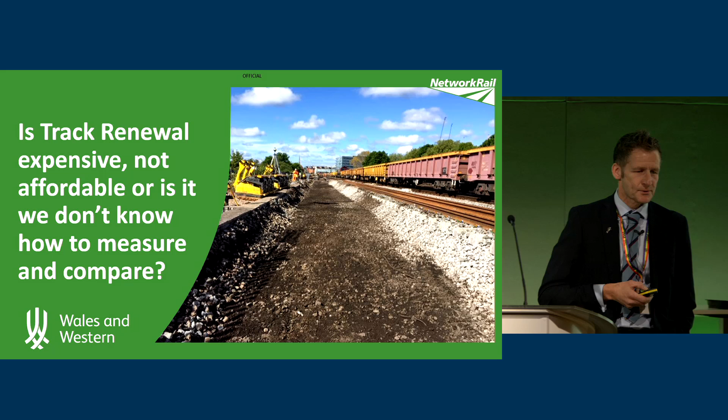There's a big echo in here. You might want to turn the lapel mic off if you could.

I could talk quite articulately about why we are where we are with some of those regions. But somebody presented me with one of these slides recently, which was actually broken down by route.

And their comments were, well, look at the guys in Wessex, they're bloody expensive. They were comparing them to everybody else. Well, actually, the guys in Wessex are the same as the other guys in Southern who deliver track renewals, because it's the same people. So it just makes the point that sometimes we compare ourselves thinking we're comparing apples with apples.

Sometimes, even if it's apples with pears, you kind of think, okay, that's still okay. But often, we're comparing apples with chairs, because sometimes we're not absolutely comparing the right things.

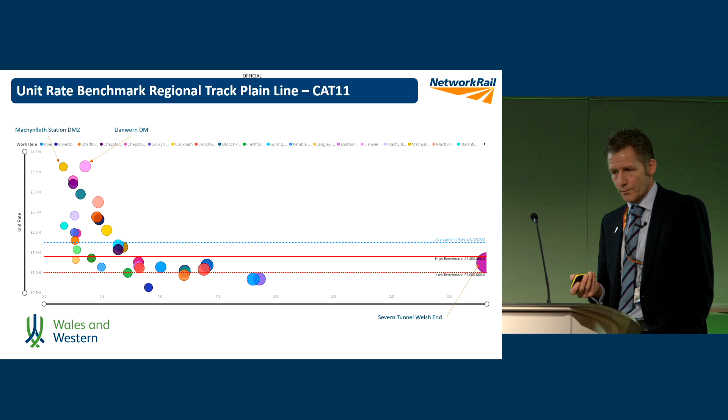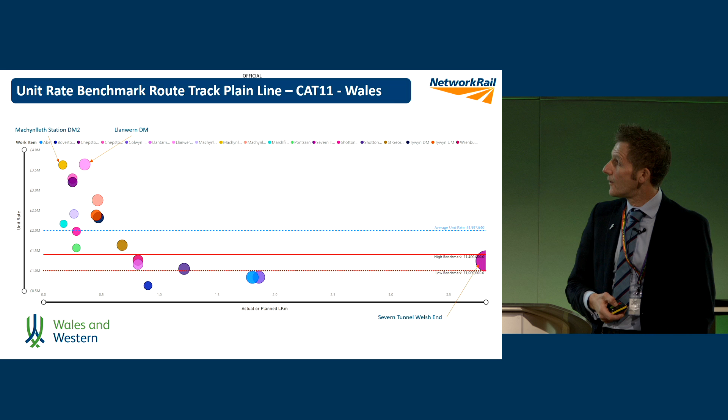So we've got all of this information now, so if anyone's interested in how we do this, I've got all this available electronically, and I'm helping my finance team in the region create this for all the other disciplines as well, not just track, so that everybody in the team, whether you're a very early stage engineer, very early stage project manager, or someone like myself, or anyone else in the team, you should be able to articulate why jobs cost what they cost.

So just to prepare for today, I thought, right, I'm going to get one of my team, which I did, to just create me the most simple kilometre job, the base costs.

This is the most simple thing, so none of that was in there. So I said, right, strip it all out, take all the complexities out. It's a nice straight piece of track between Cardiff and Newport. It's got no structures in it, no S&C in it. It's just a simple Cat 11. And all of that other complexity stuff was stripped out of the cost. And that's what it was going to cost me to do that job.

Over £1 million. Now, you saw the rates that were on that slide just now. 1.4 million was my high benchmark level, and £1 million or so was the low benchmark level. So if I do the most simple job in one stage, that's 1 kilometre in one possession, in the most simple way, it's going to cost me that, with the costs that we're experiencing. There's some fixed cost in there, and there's obviously some variable costs, because yes, we can be better. We can obviously do better. We can always do better. But that's what it was going to cost me.

Now, this is using the SRSA framework rates. If you did this exercise for the other alliances, it might be different. And also, we have 3 deliverers of track in Wales and Western. We have high output, and we have works delivery in old language. We've decided to call them construction services, but it's works delivery. So this is using the SRSA frameworks. And the type of work we put through the SRA - we did a piece of work, Andrew and I, a few years ago, to absolutely build a decision tree to say, this is the type of work that should be going to my multi-million-pound framework contractor, this is the type of work we should be doing via works delivery, and obviously the type of work we're doing through high output. So that's the kind of mix of fixed and variable.

So this slide - and I've got to thank Nick for the graphics on this slide, Nick helped me with this slide - you know, we have a lot of tailwinds which we're using to actually help us become more efficient, and I'll talk through some of those. I think we've got one of the best, certainly in Wales and Western, track is the best at planning, because we've got a work bank now with Andrew's support for almost the whole of CP7. So we're able to plan that work efficiently. I have got some challenges on, with links into one of the things that John was saying, that says my starting point for any renewal, for me as the deliverer, should be I want to do all my renewals in one stage.

So I've got a job in Severn Tunnel in the first 2 years of CP7. It's planned over 2 years at the moment. We've just done one half of the up main, and we're going to do the other half next year. The down main, I really want to challenge the team and say, let's put a plan together that gets it all delivered in one hit, one mobilisation.

It's 4.25 miles long, but we just did 2.5 miles with one of my most efficient numbers on that chart. Imagine if I could do that in one stage.

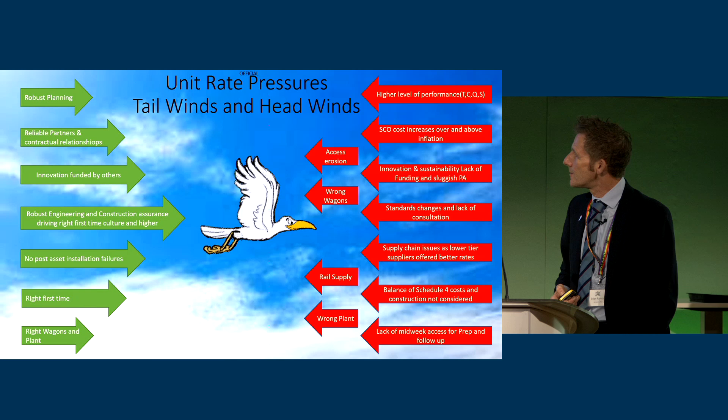There's a balance, obviously, because we're here to run trains as well, collectively. But if people keep telling me I'm expensive, my starting point will be that I want to do all my renewals in one stage, because the Schedule 4 costs aren't factored into my numbers. So I could be more efficient if I was allowed to do things quicker.

I've got a real challenge going on with Bristol West at the moment which is going to help me with that. Nick, who's in the room, who hopefully some of you will get to talk to today, is one of the best people I've got at spending other people's money, because innovation funded by others doesn't land on my unit rate, but it does help me with all my future mobilisations. It's good to see some of the stuff in the other rooms here too, because that's going to help us.

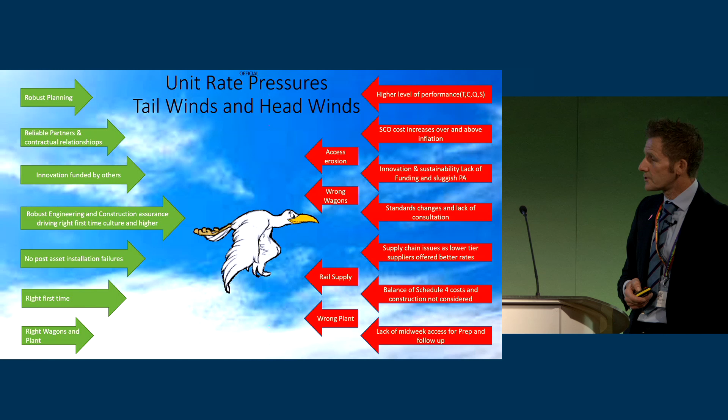We've got a really robust engineering and construction assurance plan, which absolutely drives our right-first-time approach. If I said to you I can't remember the last time in Wales and Western we had a post-asset installation failure - and there are many of you in the room who've been around for years like I have - it was not always like that in Wales and Western. I'm the track director, and I just can't remember the last one.

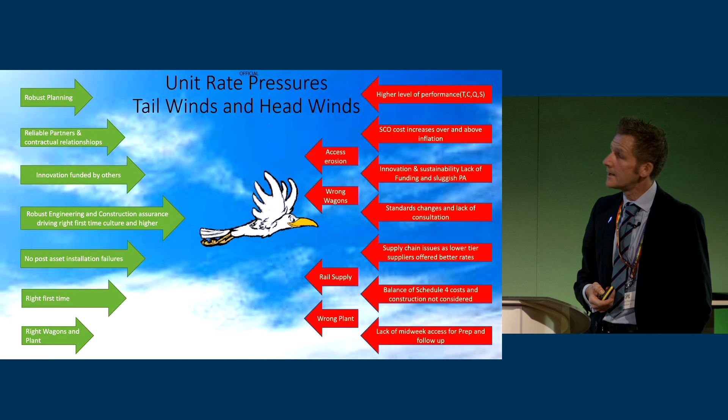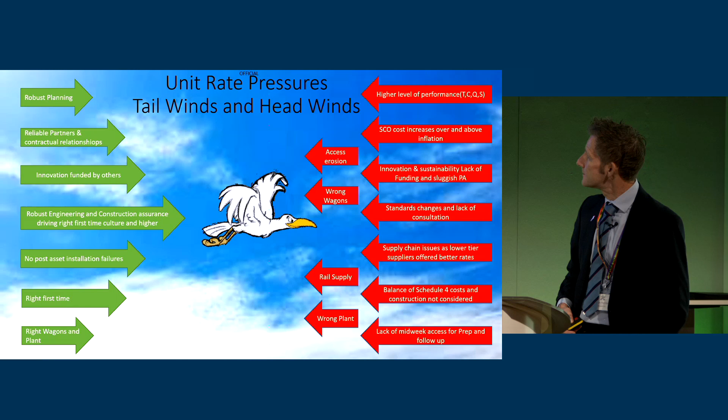But that costs money, so I'm talking about it as a tailwind, but equally you can see it on the top right as a headwind - not really a headwind, but something that's a challenge for us cost-wise. That comes at a cost. We use the expression cost of poor quality, but there's a cost of good quality as well, and I'm proud that we've got that in place such that we don't have those failures anymore. Touching wood now - right first time, post-asset installation stuff.

The stuff on the right, I'm not going to talk through all of that because I'll be here all day probably. We've got a major issue with the second one down.

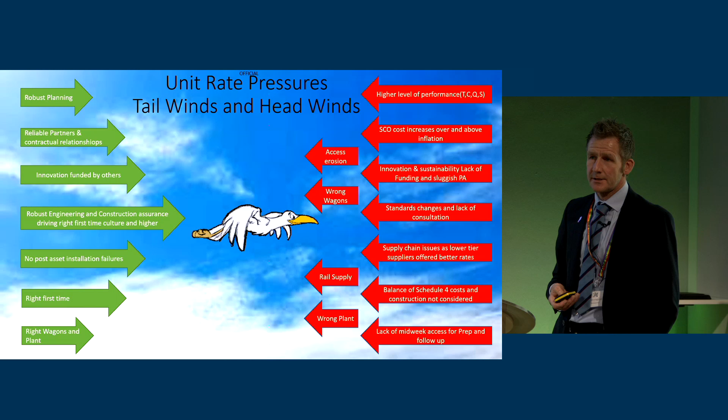Over and above inflationary increases on materials, it's hitting us to the tune of £4 or £5 million a year some years, because material prices are going through the roof, particularly for steel. It's kind of slightly out of my control because I have to use rail, unless anyone's got any plastic rail you could give me - I'd love to be using that one day in the future, but at the moment we can't.

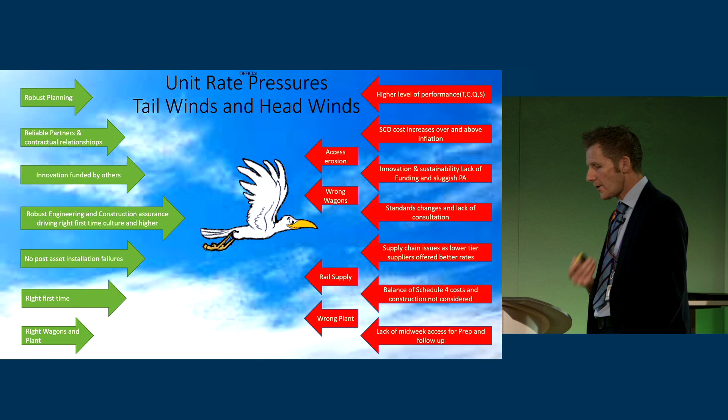Standard challenges - John touched on this. If you talk about POS, the new welding standard with the grinders, or 019 - all of those things, I kind of feel they're done to us without proper consultation. They just land: you must comply by X. Then we have to go and derogate against those because we can't comply by X. Even that welding standard is hundreds of pounds extra on a welding shift for us, like everybody else who has to do it too.

So the challenge is we are having to challenge back, and we're going to continue to have to challenge back when we haven't got the funding available to cover some of those costs. Or we lose work, and then Andrew somehow has to manage the asset in another way because we haven't renewed it. And this is a big one here, the third from the bottom.

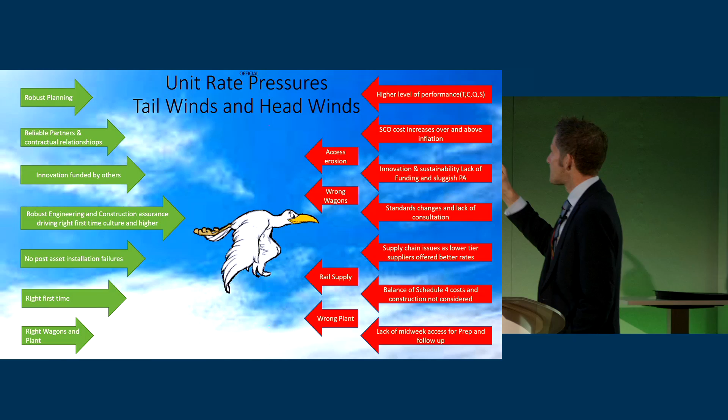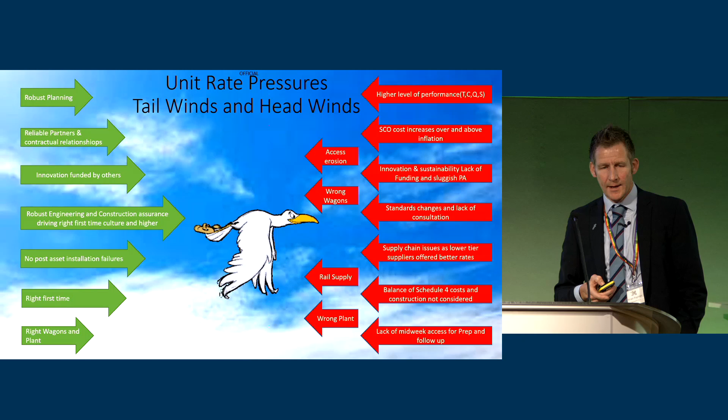If I told you that Network Rail have got higher rates for labour and higher rates for plant than my supplier has, the knock-on effect is my supplier loses out because people wanting that extra 50 pence an hour will go work for Network Rail's contingent labour contracts instead, because they've got higher rates. And it's not 50 pence, I'm talking pounds difference, because the Alliance have negotiated what we think are really good rates.

But actually, the people who are suffering are the ones who need that cash. The really low rates hit the people out there doing all this work for all of us. They're the ones hit in the pocket.

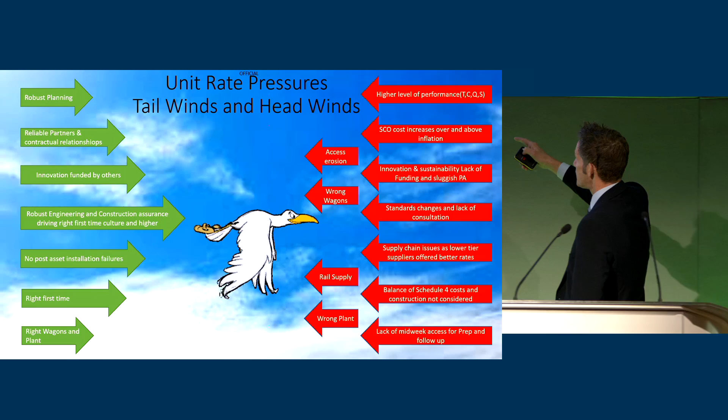And then, in fact, the bottom two: the balance of Schedule 4 costs isn't considered when we talk about unit rates of track, and it should be. And the bottom one, there's also one about access erosion.

Really, really challenging, because we've got a massive peak demand of people at the weekend. We can't use those people in the week because there just isn't any access.

Midweek, not necessarily massive access, but there was access. And at weekends, it was 50 hours every weekend almost in Southern - not necessarily Wessex, but the old Sussex and Kent part of Southern before it was devolved. So yeah, access is a major issue for us.

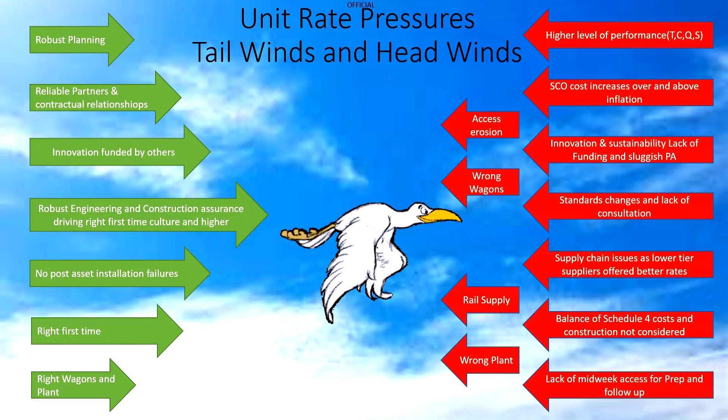We've got some real problems in the Thames Valley and Wales and Western for CP7, because we've been told that because the Lizzie Line's now open, think again about the access you think you need for all your S&C. So Andrew's S&C plan for CP7 is quite Thames Valley heavy, so I've got to find a way of innovating to deliver that work more efficiently.

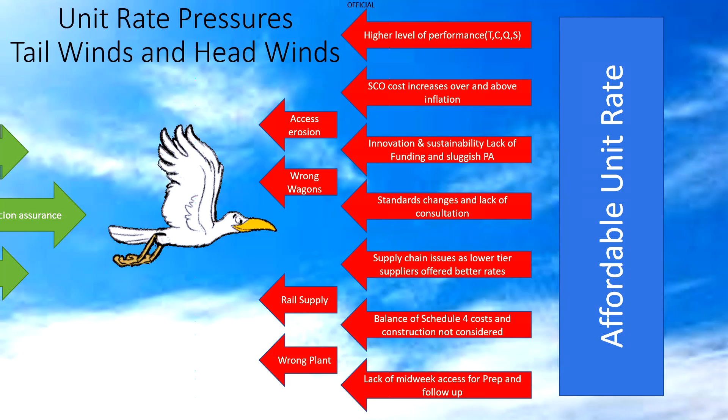If I can get rid of some of those headwinds, or deal with some of them, it means I can perhaps get closer to this affordable unit rate. But it won't be cheap, because I'll have tested this so much that it'll be the most efficient way at that point in time - though that still doesn't mean I can't be more efficient. And I'm scared of seagulls, by the way.

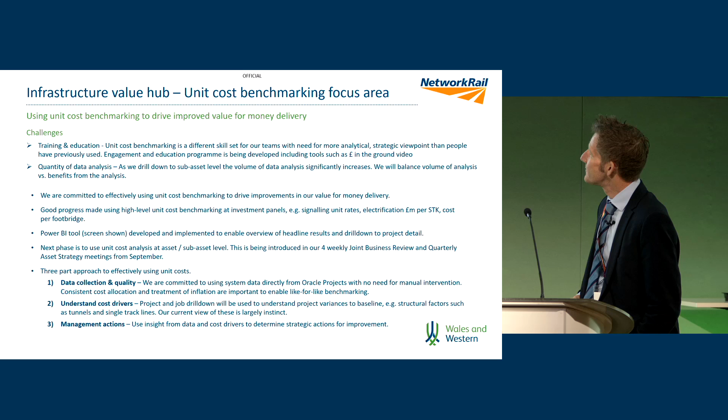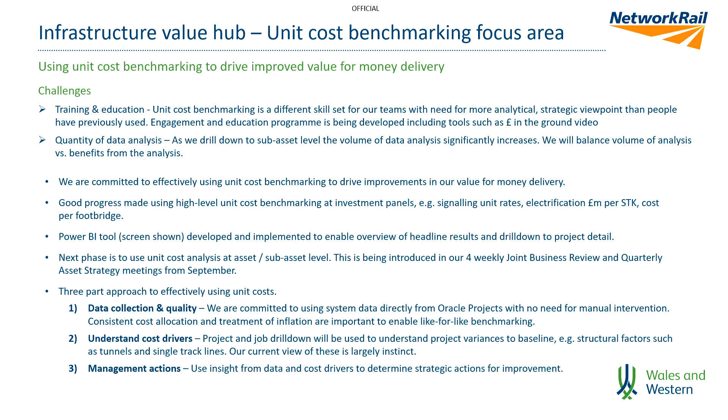So that slide's great for me. Right, so that slide there, I'm not going to read through any of it, it's just there for information because I'm sure these slides will be shared. We recognise this problem of understanding what the unit rate actually is and how we're comparing it in Wales and Western. It's part of the conversation a lot now, and those scatter graphs really help us articulate the issue.

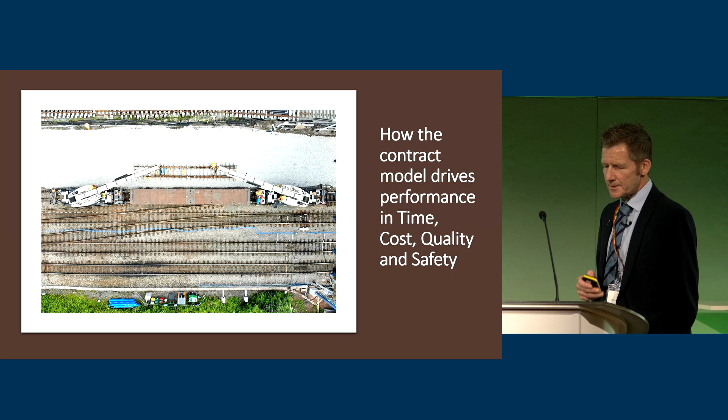So, I don't know, a slide seems to have disappeared from there for some reason - a video slide. Anyway, I'll come back to that if we can. There was a video that should have been after that last slide.

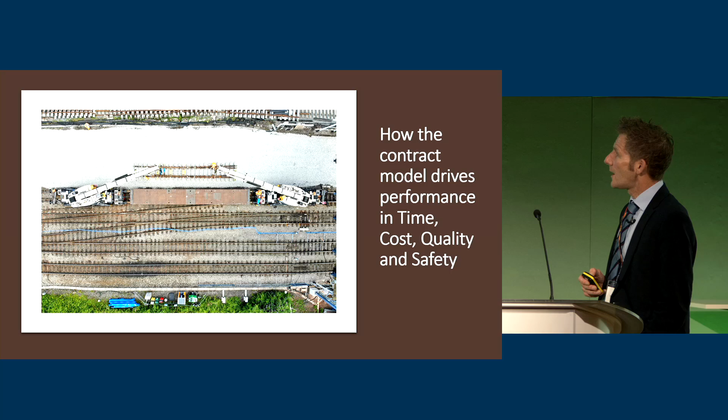But anyway, so we have three ways of delivering track in Wales and Western: as I said, construction services, high output, and the Alliance.

So I've worked under many contract models over the last 30-odd years, and I used to work in the contract supply chain in track renewals. I think the one I've got at the moment, doesn't mean it can't be improved, but it's probably the best that I've had. And it changes every year too, so it's getting better. Some of the things we've done over the last couple of years have made it more open and better than it was before, even though before it was good too.

And the Alliance is all about brand - they don't talk about themselves as Network Rail, Colas and AECOM.

It's started to slip in, and I'm running a workshop in January, February time to kind of alleviate that again. But they talk about themselves as the SRSA, as some of you will know, who work in Southern and Anglia as well, who use the same contract.

It's open. The costs are so open that if it is expensive, then I should know why, because I can see every single penny that gets spent in that contract. I am sure there's some games in there, because I'm the person trying to save the taxpayer money, and the contractor's the person who's actually trying to make more profit. There may well be some games in there, but we've got it so open now that there shouldn't be anything hidden.

There's continuity, experience. It's quite a unique track. There's people who are sat in this room here, Marcus, who sat at the front here. There's so much continuity in that team that there's people who've been around a long time, which is fantastic. There's lots of experience in engineering and delivery and project management, program management in that alliance, which is fantastic. But equally, the alliance is probably the best organisation I've seen so far at developing new people who can go out there and lead track renewals on site and can be the next Marcus when Marcus decides to finish.

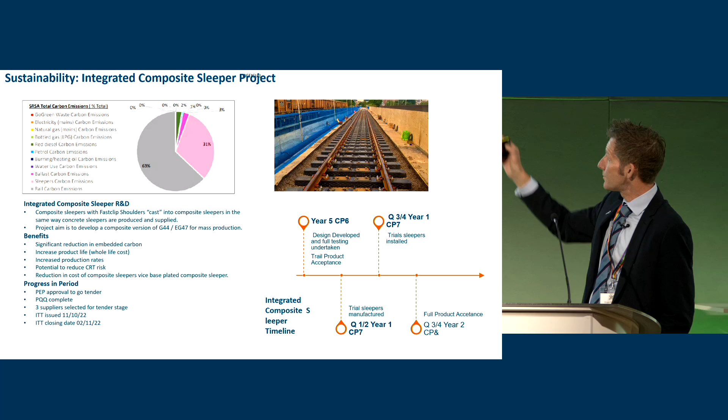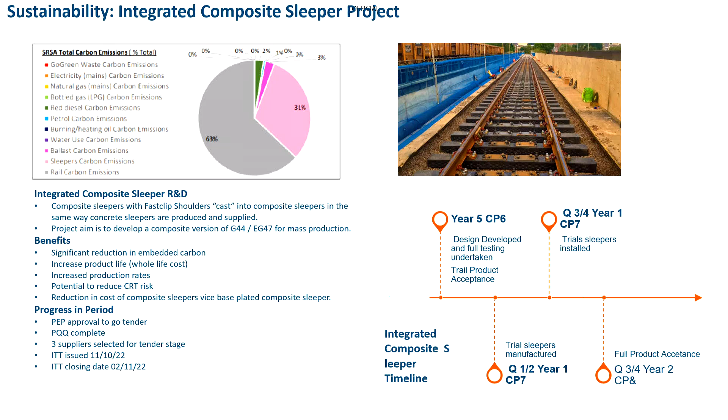So from a whole life cost and sustainability perspective, it was the right solution, but it cost a lot of money. And also, Nick's going to love me for saying this, I call that the unsustainable sustainable sleeper, because of the amount of ironwork and steel on top of it. So what Nick is working on is a project to actually integrate a Fastclip housing into the sleeper, even if you've got guardrails that are required, which is what Chepstow has, integrate the housings for those as well, such that there's less steelwork on top of the sleeper, so it becomes a more sustainable sleeper. But still some work to do on that. And Nick's going to be around all day, so if anyone wants to talk to him about that, please feel free to do so.

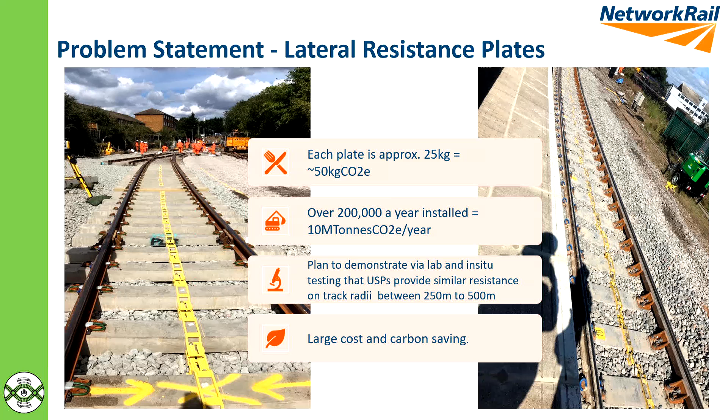These are one of the things I hate. These are lerps. Obviously, I know why they're there because I've got the background of being technical myself. I know why they're there, but I know how much of a headache they are to install and maintain. If I told you that site on the left there, that's an S&C site at Drayton Green. And these, both my photos, I took that photo thinking I would use it, and I knew I would eventually someday, and I've used it a couple of times now. I spent about £450,000 installing lerps on that site.

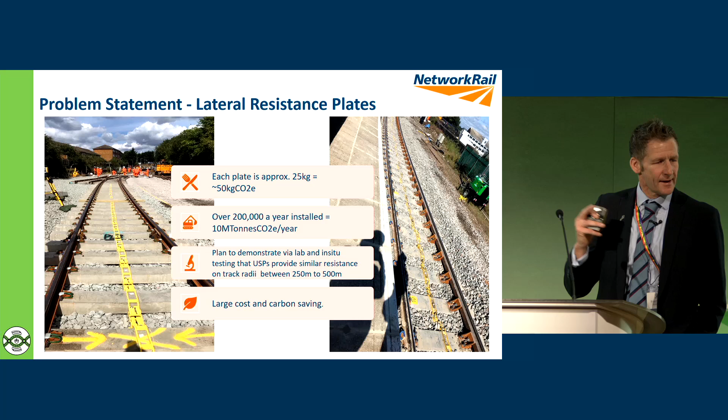So we need to find another solution because that's not a sustainable solution, and it's not a practical solution. Has anybody in the room ever tried to install one of these? Yeah, they're not the easiest thing to install either. So we need to work on a way of actually maybe getting rid of them. That site there is Bristol East. And again, you look, that track is never going anywhere. The fact that it's pretty heavy anyway, because it's got a check rail on it, and it's pretty heavy bearers, and there's a platform on the outside of the curve, and we've put lerps on it. If Armageddon comes, that track's still going to be there, along with Great Western Electrification. It'll all still be there. So yes, we need to work on that.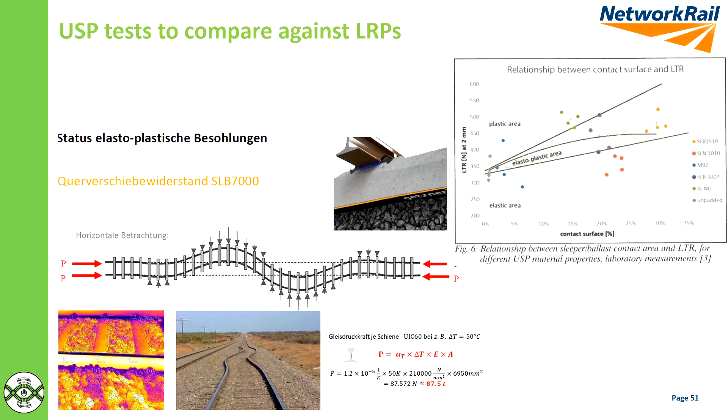And working with Darren, and Darren's got a slot later on, so I'm not going to steal any of his thunder. We need to work on, if this is a reality that USPs could become the new LRP in a way, then absolutely Nick and I are going to support this project all the way through to the end until we get there. So this, and I'll just let this play for a bit, not for long. This is Bristol East, and it's not playing for some reason. But anyway, that's Bristol East Junction. The video's not playing, unless I can press a button on here.

But anyway, that Bristol East Junction, I did have to fight a little bit for the cash to install undersleeper pads on that junction. But the only way I was able to fund it was by me creating my own efficiency. So we created about £450,000 worth of efficiency on the job, and then got the agreement to spend some of that efficiency on undersleeper pads. And I'm going to declare that I think it's one of the reasons why that junction, I know it hasn't had a major failure since September 2021 when it was installed.

50 units of S&C. Normally when we were installing S&C years ago, we would have the odd failure. We haven't had a major failure. There's been a few minor signalling issues with it, but nothing major on that, and it's a 50-unit S&C job. Going back to the Alliance Works, and there's people in here who worked on that project, probably one of the best jobs I've ever seen delivered. Absolutely fantastic. I see I've got 2 minutes left, so I'll flick through these.

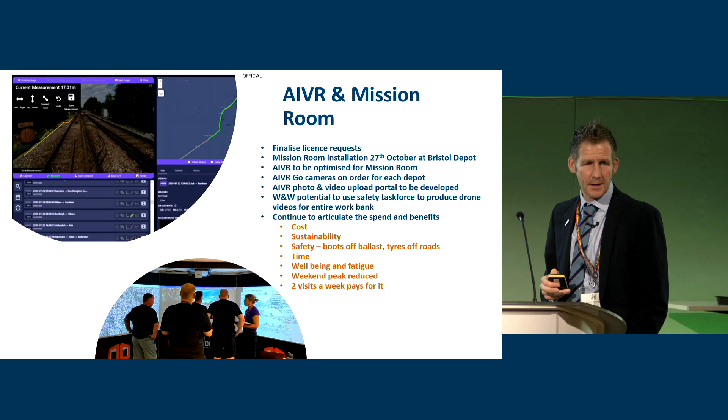We had a near miss recently at Westbury where 9 people could have got bowled over because they were walking the wrong line. Doing a Thursday pre-weekend visit, they were walking the down, they should have been walking the up. They had a line block on the up, could have been bowled over. So my challenge to the team is, why did they need to go out there to do that weekend pre-site visit? We're working with One Big Circle and Mission Room to create a joint virtual walkthrough.

That can take away some of those walkthroughs. All the stuff in red, I won't work through that list because I've got about a minute left. All of that stuff, it's going to pay for itself. I've spent a fair bit of taxpayers' money on this, but I'm glad I have, because I'm going to save more than that taxpayers' money over the next 6 years with this alliance.

Because people are, at least once a week probably, somebody over the UK is going onto track in a line block, walking the wrong line and having a near miss. It's a simple concept, but simple ideas save lives. It's not the big whiz-bangy tech stuff that you're going to see outside. But everything else on the railway seems to be marked up, and we've never really marked up all of the track, so we're going to mark up all of the track now.

At every access point and at critical junctions like Bristol East you just saw, the track's going to be marked up with basic information such that people can't get it wrong. It's a last layer of protection for the people who we are all here to protect.

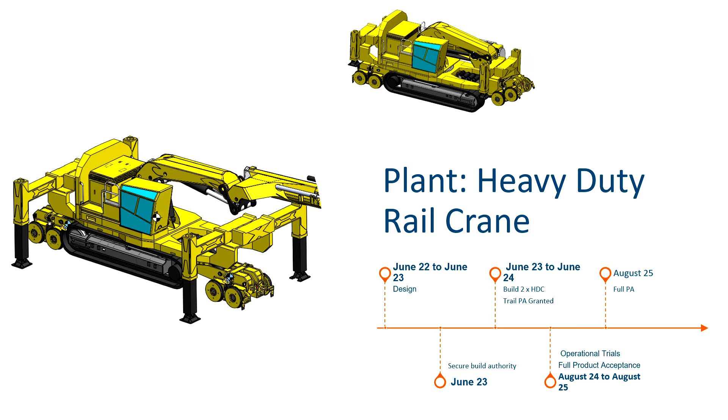And then there's some other stuff, which I'll go through very quickly. We need a replacement for Kirows in the future. They're going to be clapped out in a few years' time, I'm sure. So Nick's working on this. Please feel free to talk to Nick today.

The MFS Pluses have gone from - well, I think they're still here, but we can't procure them for some reason. So Nick is working on whether there's a road rail version of an MFS Plus we can use that can actually work in single bore tunnels and feed the MFSs that sit outside the tunnel. So please feel free again to talk to Nick or I today.

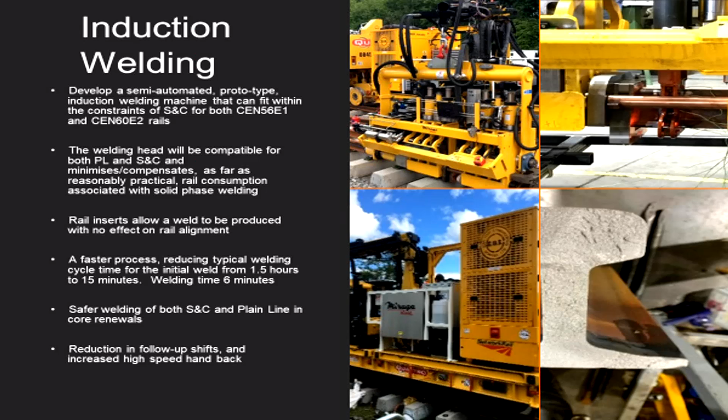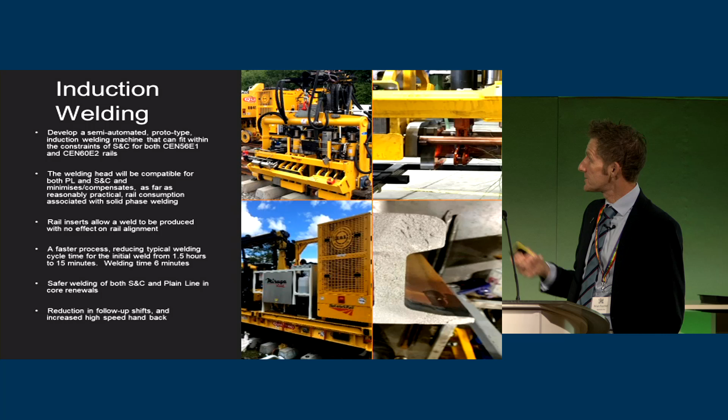And the last one, induction welding. We've been talking about this for so long. This is game-changing, absolutely game-changing, but we're just struggling to give it that last push over the line. This is one of the projects that Nick is spending somebody else's money on, which I'm glad of, because we're going to get it over the line eventually. For me, it'll revolutionise S&C renewals and Plainline, but more so S&C, and it'll bring that unit rate down even further. And I'm sure, and in fact I know, that this is certainly more sustainable than a thermit welder we go and drop out on track.

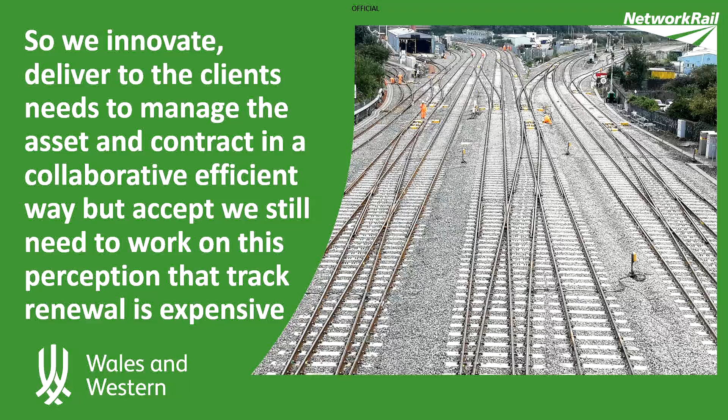So that's me, and the final bit is, if we innovate, deliver to all of my clients' needs - because I deliver for lots of third-party people as well - and we do it collaboratively, we'll remove that perception, but we know that we can always be better. And that's me. Thank you very much.